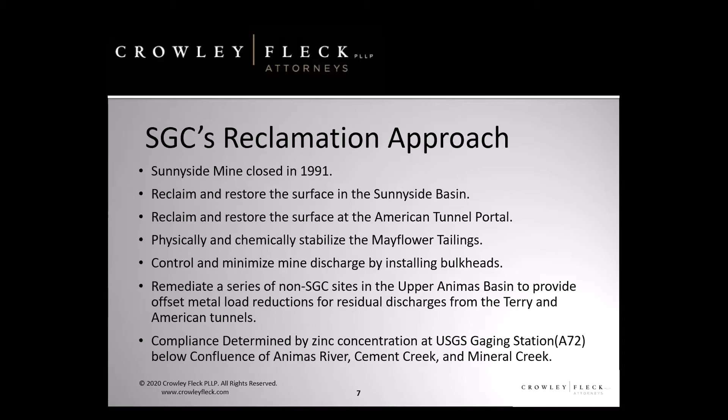So that was the plan in 1991. This plan was set out actually in their reclamation permits, even as they began mining. It was ultimately put into a consent decree with the state of Colorado and approved by a court. EPA was not a signatory to the consent decree, but they reviewed the plan that was put together, provided comments, and ultimately endorsed the approach.

The experts reviewed the proposal for bulkheads and concluded this was an ideal location for that type of approach based on the geology and the ability to restore the hydrogeology with bulkheads. EPA applauded the parties and this kind of new basin-wide approach to water quality, not just site-specific, but basin-wide. So that was the plan. It was reviewed, it was approved, it was published, it was commented on, and Sunnyside went to work.

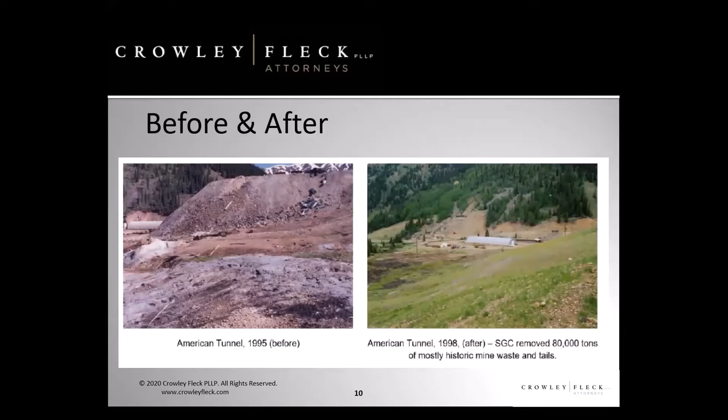I mentioned the bulkheads. That was a big part of Sunnyside's reclamation plan. The intent was to restore natural hydrology. Before mining, the mountains would have been full of infiltrated groundwater. After mining, that water comes out the adits. If you put in a bulkhead, the water is back to where it would have been before mining. So SGC installed a series of 9 bulkheads in the Sunnyside mine and the American Tunnel and the Terry Tunnel. Those bulkheads, they're massive. They were engineered, over-engineered, over-designed with factors of safety, and they isolate the interior workings of the mine and prevent water flow from the interior workings directly to the surface through those adits.

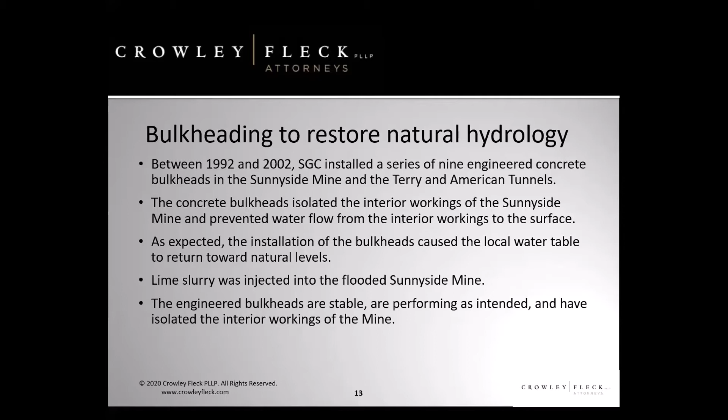As expected, installing bulkheads did cause the water table to return towards natural levels. So you had some seeps, springs, and other flows increasing. That was, again, the goal. That's what it was like pre-mining. Sunnyside also injected thousands of tons of lime into the mine pool to try and speed up the neutralization process. All of the bulkheads Sunnyside installed are stable. They're still performing as intended, and they've served their purpose. They've isolated the interior workings of the mine.

Again, what was somewhat unique about this is the region-wide approach to reclamation. Sunnyside would be released of its reclamation obligations, both in exchange for bulkheading the mine drainage, but also for completing other reclamation projects in the region. So they installed 9 bulkheads on property they owned and property that they didn't own. They also removed mine waste and historic tailings from other properties and put it on the Mayflower impoundments, and then again recontoured and reseeded areas to improve stability and vegetation.

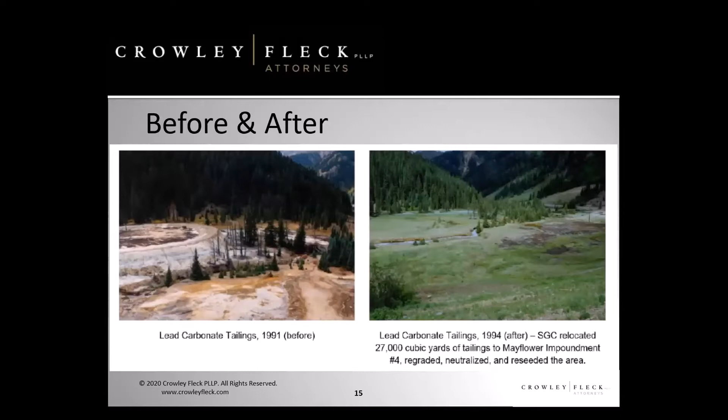So this is a picture of the lead carbonate tailings. This is an area Sunnyside never owned or operated, but reclaimed as part of their consent decree and reclamation obligations. And again, it's sort of risky to touch a property you don't own with CERCLA, but that's the decision that was made and the efforts that they undertook. So that's where things stood.

They spent, and this number has grown, $30 million on reclamation and remediation. For their efforts, they won an award early on from the Mineland Reclamation Division and the Department of Natural Resources in Colorado for just bringing the site back into compliance from the way it was left following the Standard Metals bankruptcy. And then again, as part of their closure activities, they won that Mineland Reclamation Award in 1994.

They ended up fulfilling all their regulatory requirements, complied with their reclamation obligations. The consent decree was released in 2003, and things seem to be in a fairly stable status. That's how it was in 2015. The bulkheads had been in place, functioning as designed for many years.

State of Colorado and EPA were doing work on other sites in the area, installing additional bulkheads to further restore that natural hydrology. I've heard it described as a whack-a-mole approach. As water comes out one adit, you bulkhead that one. As it moves to another adit, you bulkhead that one, and slowly you put the mountain back to the way it was before mining. So EPA and Colorado put a bulkhead in at the Red and Bonita mine.

They did not close it. They just closed it for the first time this summer. And they were contemplating an additional bulkhead at the nearby Gold King mine. And bulkheads, the purpose is you fill these mines with water, you submerge the metals in water, you reduce the oxygen availability, and then you reduce ultimately the generation of acid rock drainage and thereby improve water quality. That's the whole point.

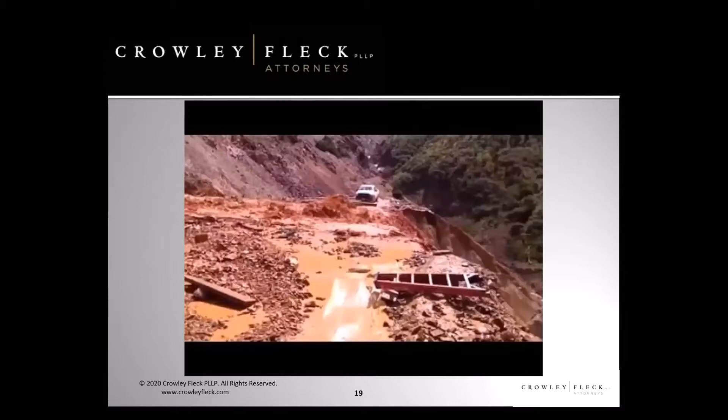EPA and its contractors are working in 2015. They excavate into the exterior of the Gold King mine, and they end up releasing about 3 million gallons of impounded water. That water washes away a BLM-owned waste pile. It turns the Animas River bright orange. People will remember that slug of tan-colored water makes its way downstream for several days and eventually, weeks later, settles out in Lake Powell. I think this video will play and you can see really what happened on the day of the event.

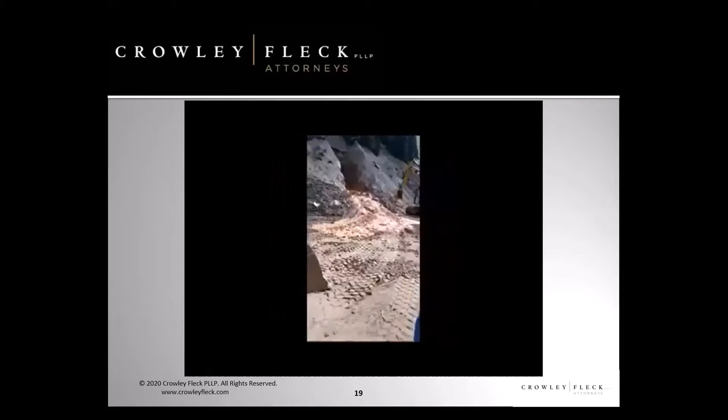Whoops. I'm going to go back and try that again.

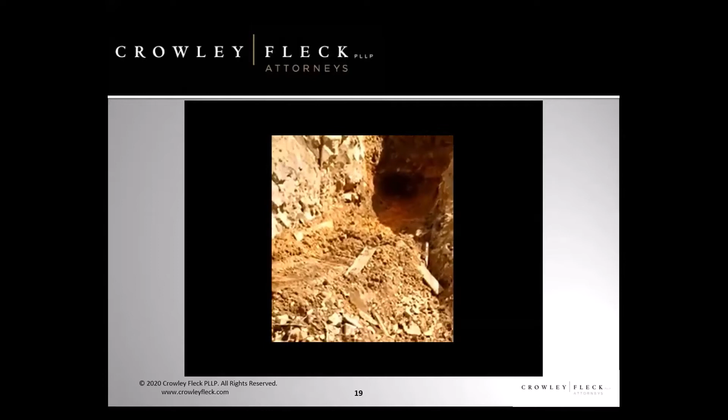See, this is as EPA's excavating into the exterior, then drainage starts coming out.

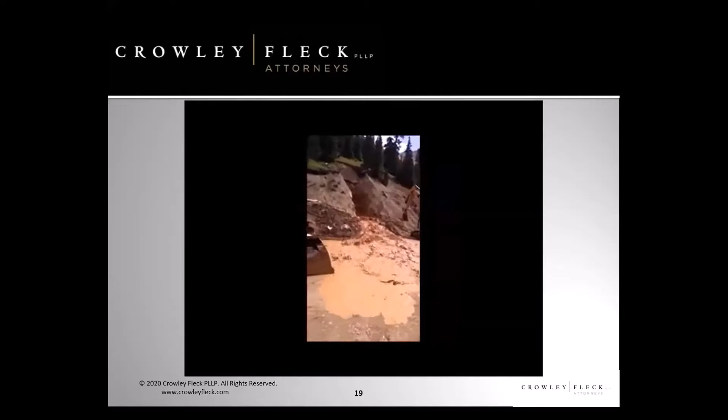Really high. Is he gonna go close it up?

The suggestion that they close it up, you'll see, was not followed.

What are we doing now? Get a little video of this, I suppose. We were back 20 feet out.

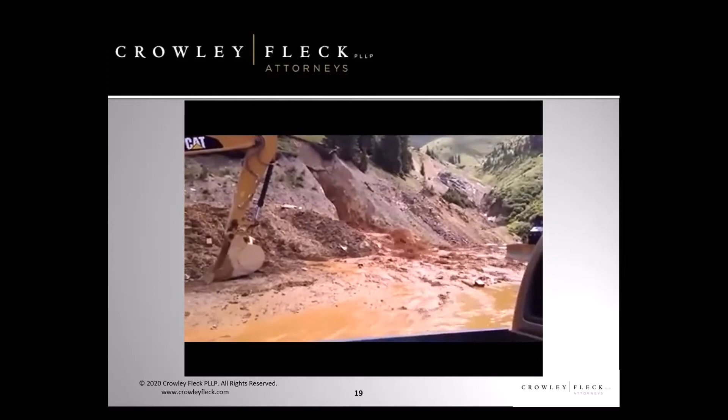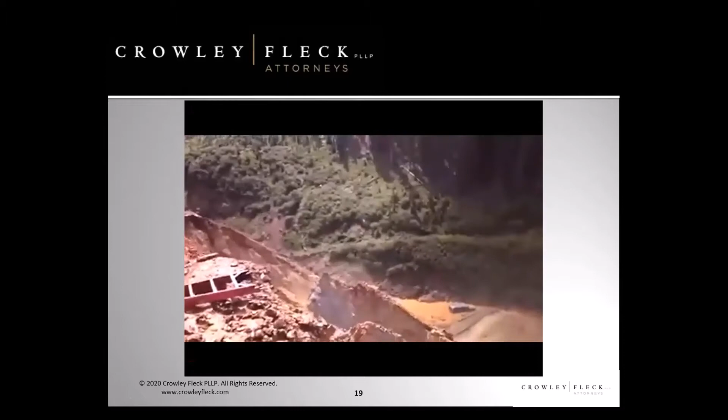That's the BLM waste pile downstream that ends up being washed away. It's saying that's all the water coming from the Gold King mine. The volume is estimated at about 3 million gallons, and it comes out very quickly.

This is a famous picture that was taken of kayakers in the Animas River. You can see that's what ended up happening to the river. The color that it turned generated national and international media coverage. Here you can kind of see, that's what the river used to look like. And then this is the slug of orange water making its way downstream.

Ultimately, there was no impact to the fishery. That was good news. The river returned to pre-blowout conditions within about a week. The New Mexico Environment Department has found no long-term damage to the environment. State of Utah, their environmental folks reached the same conclusion. I mean, it looked bad, but it actually didn't cause much, if any, damage to the environment.

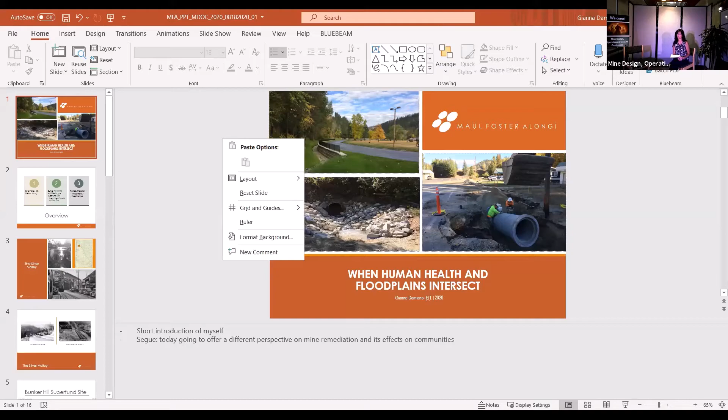So our next presenter is Gianna Damiano from... what's that? Gianna, can you flip your PowerPoint display settings? Is that better? Is that better, Dan? Could you try it again?

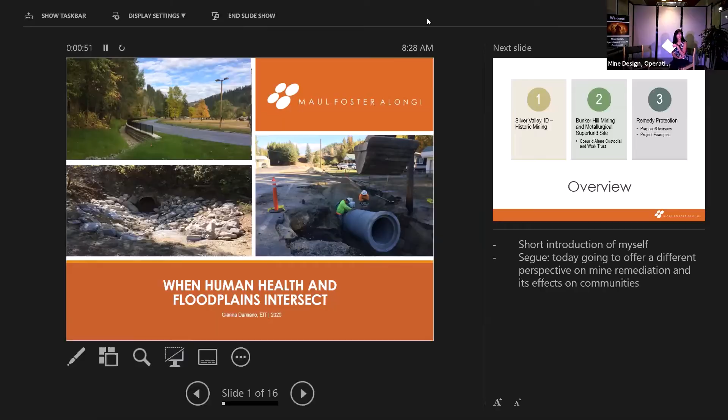Okay, well, while we're waiting for the PowerPoint to get sorted out, I will introduce Gianna. Gianna Damiano is an engineer with Maul Foster Alongi in the North Idaho offices. Since her career began in 2016, she has been involved with projects on the Bunker Hill Superfund site in the Silver Valley. Through her experience as the oversight officer and client representative and now project manager for stormwater management related projects on the site, she has garnered a unique perspective on using engineering principles to benefit communities. Today, she will be speaking on this intersection of communities and remediation efforts at the Bunker Hill.

So welcome, Gianna. Thank you, Susie. Is it all sorted out now? Yes, it looks good. Perfect.

So good morning, everyone, and thank you for the opportunity to speak to you today about projects that I've been closely involved with for the last 4 years. As Susie mentioned, my name is Gianna Damiano. I work in the Kellogg and Coeur d'Alene offices for Maul Foster Alongi, and have been working for the last 4 summers up to last year on projects within the Bunker Hill Superfund site called Remedy Protection, which is what I want to talk about today. And it might be a slightly different perspective on mine remediation and its effect on communities than we've heard before.

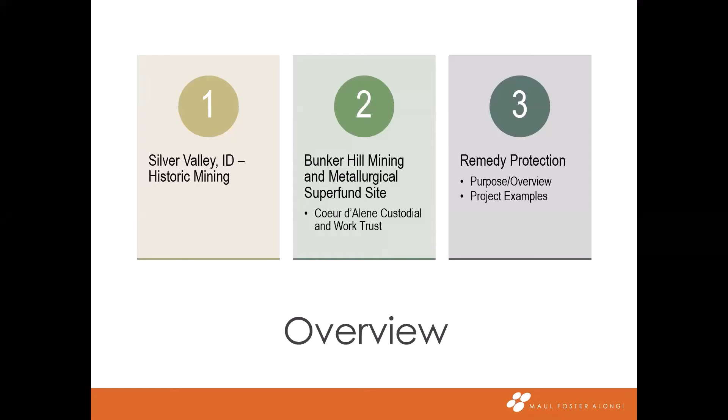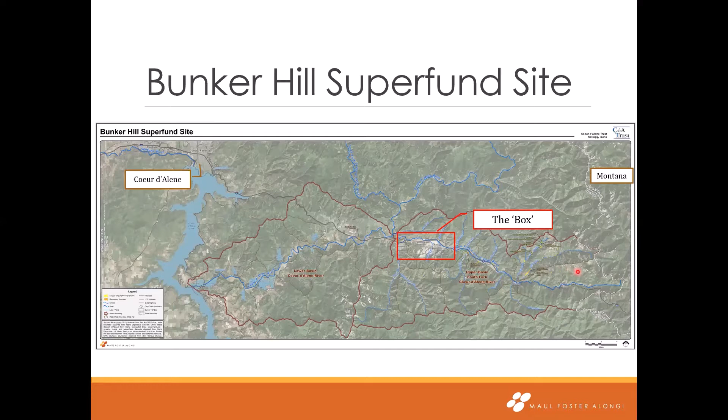So the program that I want to focus on and dive a little bit into today is called the Remedy Protection Program. It is a program that was implemented to protect the selected remedy from erosion or recontamination caused by contaminated stormwaters. So what is this remedy that I keep mentioning? This remedy that's being protected is the 5.9 million square feet of clean soil caps that act as protective barriers between contaminants of concern, which among the list include lead and arsenic, and receptors in mostly residential areas.

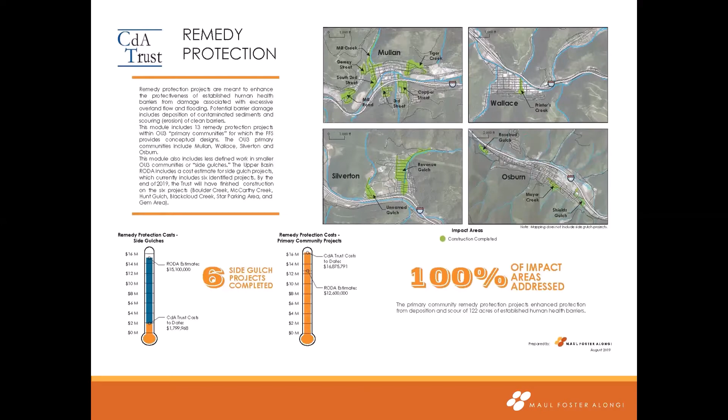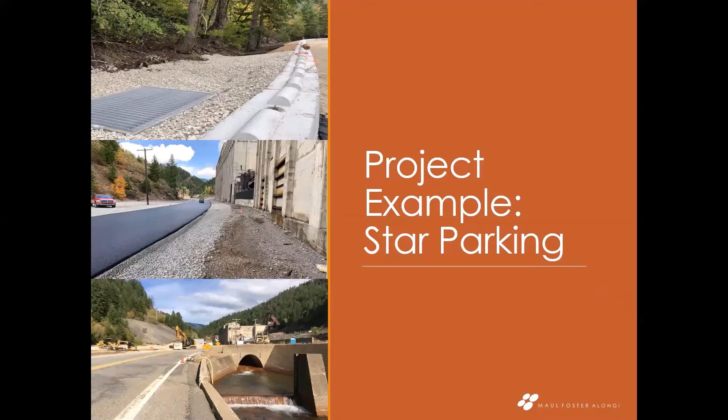And here we installed a couple inlet structures, approximately 900 feet of storm drain pipe, 3 catch basins, and a couple manholes, as well as surface restoration items that range from riprap to topsoil with seed and asphalt. And this was a project example of one of our side gulch projects, not in an incorporated city.

The next project, we'll move to Mullan, Idaho, on the Mill Creek project. Mill Creek was a channel capacity and conveyance project along the flood-prone tributary of Mill Creek in Mullan, Idaho. The channel was undersized to carry capacities modeled in the design storm, posing flood damage and ecological risks to the houses and remedies along its alignment.

The old channel also posed safety risks to the community as portions of the channel flowed through an old box culvert that caved in a yard that had children living in that house at the time, as well as the channel ran through a house basement at one point and under walkways that just had planks covering it.

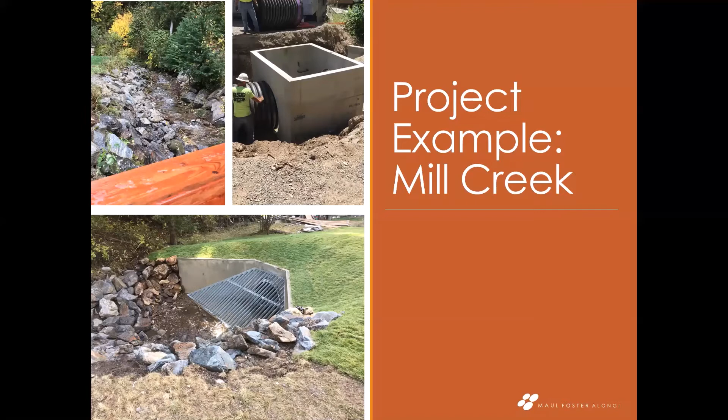And though the community that we were working in was fairly small, it had a large drainage basin north of it that came down off the hill and all discharged down this road. And most of the culverts and previous infrastructure had been long clogged, causing overland and sheet flow just down this road in the spring.

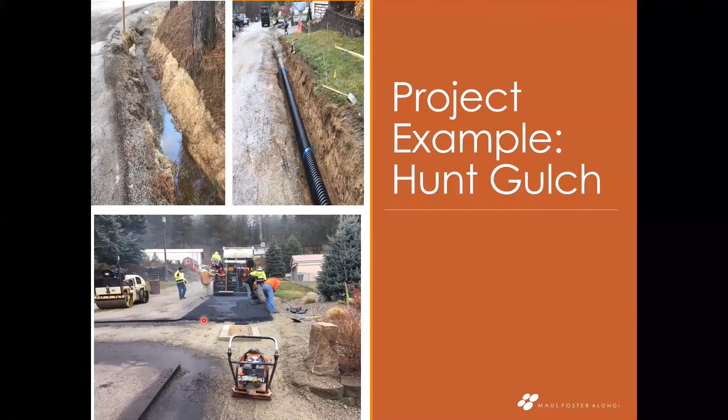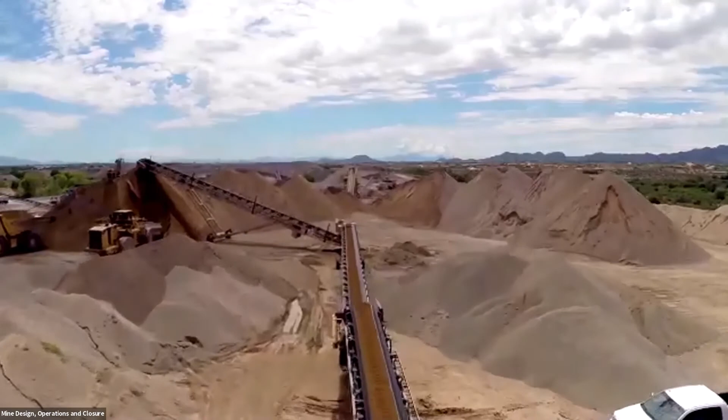Well, the material at this site ends up in a lot of different places: roads and highways and infrastructure and houses and sidewalks and schools. Materials that are mined here are really the building blocks of our society. And without sand and gravel mining, you don't have the modern society that we have today.

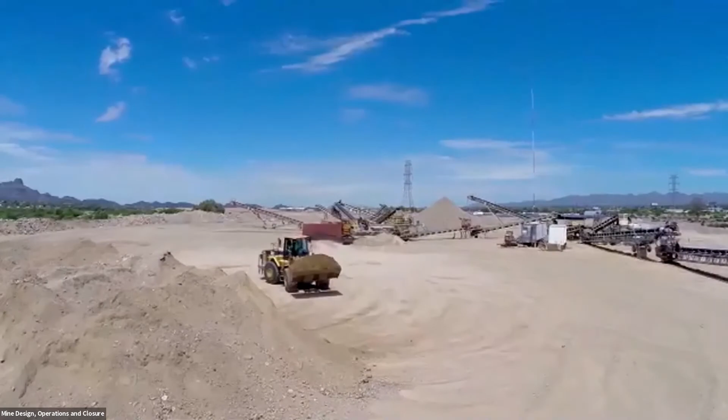We look for solutions that fix kind of the bigger picture. We're not just out there putting a hammer on a nail head. We're out there saying, okay, who are the stakeholders? What are the issues involved? What are the kind of interchangeable pieces here? Things that make a difference when you're trying to build a solution that meets multiple needs.

We have our core practitioners, the people that have had their boots on the ground on mining sites, have often worked in the mining industry. We've got one profit and loss center, which doesn't silo our resources and our people. We don't compete against each other to solve our clients' problems. We can take diverse experience in different industries and apply them to deliver some innovative solutions for our mining clients.

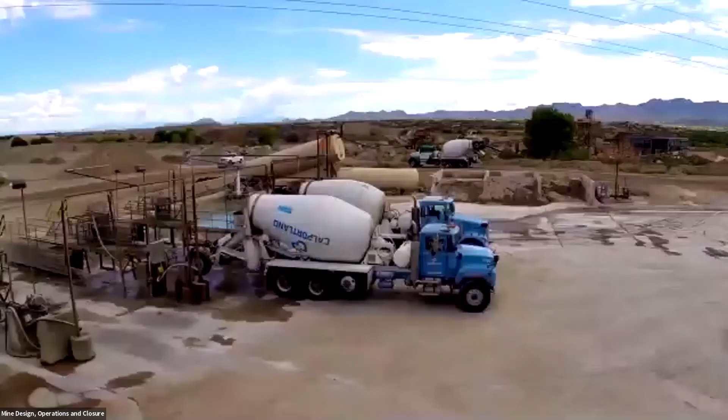We ask a lot of questions. We ask questions about, okay, what are the things that are immediately right in front of us? What do we need to fix right now? Who are the stakeholders involved? What are the other pieces of the puzzle? The idea is that we come to the table once we've done a lot of listening with solutions that really fit our clients' needs.

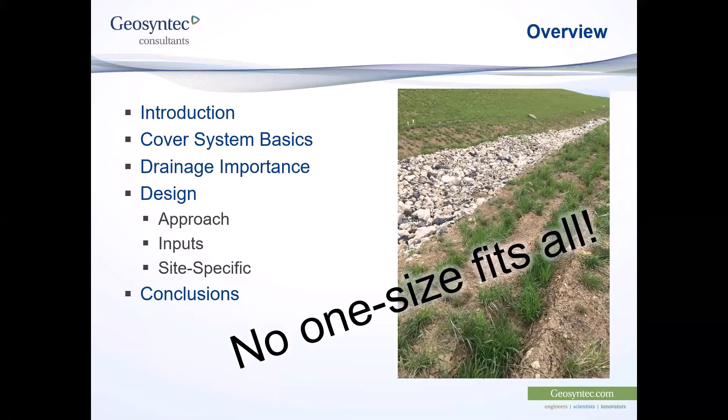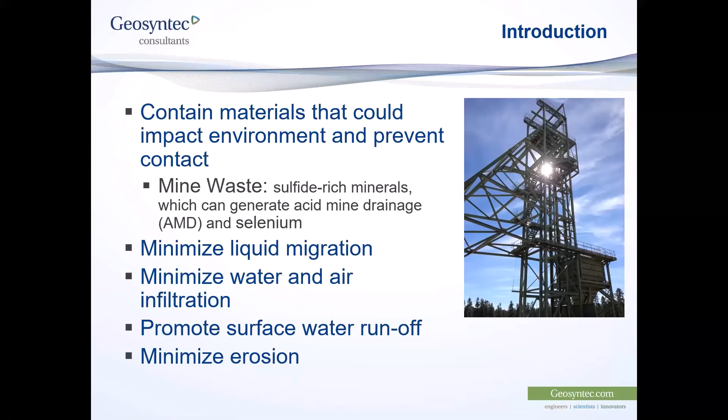Why do we have cover systems? Well, a few reasons. They contain materials that could impact the environment and prevent contact with those materials. In mining, that might include sulfide-rich minerals, which can generate acid mine drainage, and selenium leaching rock. They minimize liquid migration, so if you already have liquid in your waste, it minimizes the mobilization of that liquid. It minimizes water and air infiltration, the key to minimizing AMD and selenium leaching, and promotes surface water runoff and minimizes erosion.

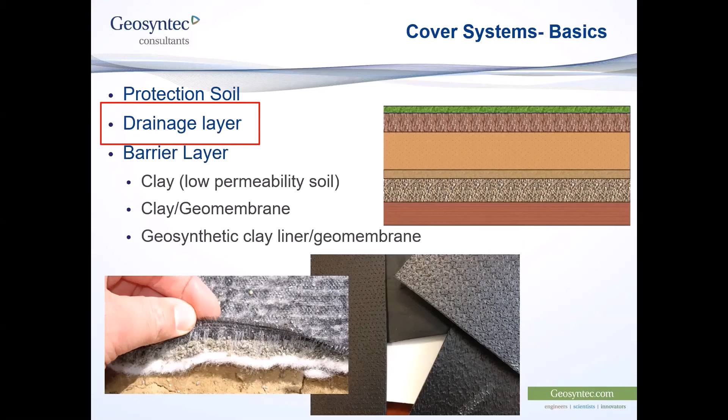The drainage layer material may consist of aggregates such as rock or coarse sand, or a geosynthetic layer such as a geocomposite, geonet, drain liner, and/or geotextile. Typically, the geotextile is used in conjunction with the drain liner or geonet, or as a component of the geocomposite, and is less common alone. In the rest of the presentation, I'm going to generally refer to the design of geocomposite as the more common geosynthetic drainage material in this application.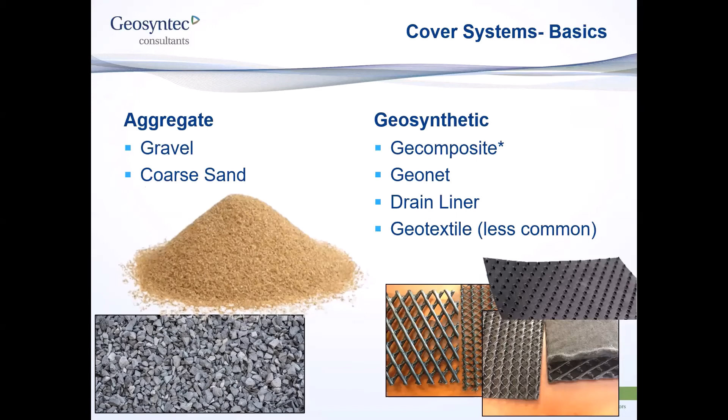We're primarily going to focus on the capacity today and how to design a system for the right capacity, accounting for worst case flow conditions to minimize veneer stability concerns, and account for reduction factors such as clogging.

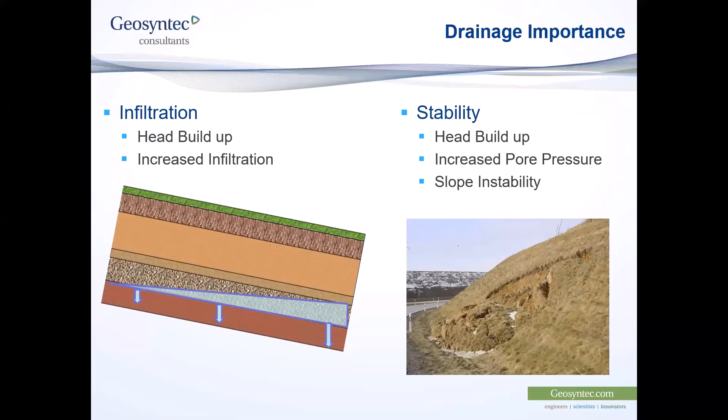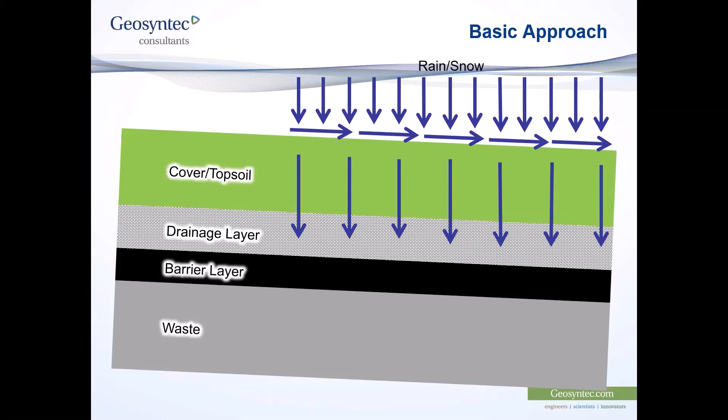Now that we understand the importance of drainage, how do we design for it? Rain and snow fall and collect on your topsoil, and a portion runs off. As the rain continues, or as the snowmelt continues, water starts to infiltrate or percolate through the cover. This is typically assumed to be unit gradient flow to account for rain on snow or snowmelt conditions. The drainage layer begins to fill, and water travels downslope with its depth or head rising as it continues downslope. As the water head increases, the driving force through the barrier layer increases, and saturation and potential destabilization of the cover soil begins.

Based on the resulting impacts to the overall cover, the drainage system needs to be designed with fairly basic concepts: contain the flow in the drainage layer, minimize head as a driving force through the barrier layer, and do those two things by providing an outlet for the water in the drainage layer, which might be a bench or a pipe.

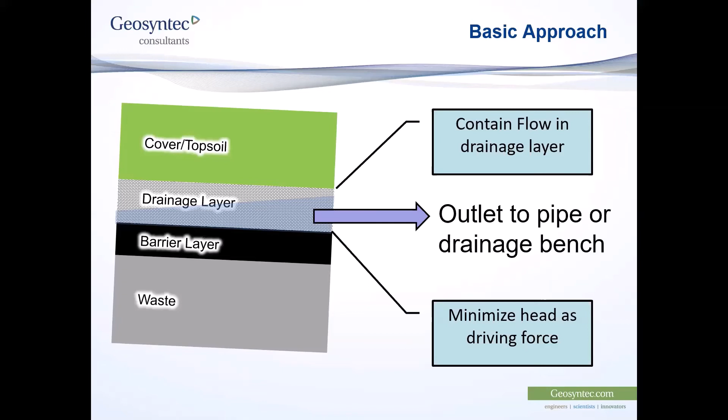Conceptually, there are three main components which can be adjusted to develop the site-specific drainage to achieve the basic goals. The first is the saturated hydraulic conductivity or transmissivity of the drainage layer, or how fast the water will move through the layer. This is material dependent, so it coincides with your selected aggregate or geosynthetic. The second is your thickness. This is a variable that the designer can control in the case of an aggregate, but is more fixed in the case of a geosynthetic, which come in different sizes such as 200, 250, 300 mil thicknesses.

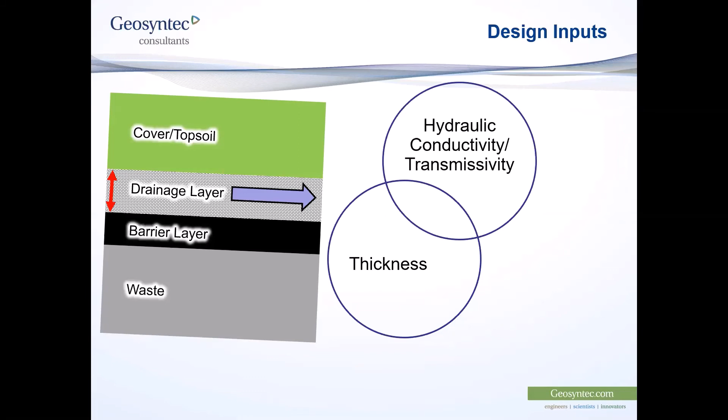The third is your outlet spacing. This may be dependent on how you're building your dump and the associated benches for global stability or simply constructability, or can be drainage design specific, such as this cover drainage or your stormwater system.

So those of you who remember your Soils 101 course may recognize what these elements are: essentially Darcy's Law. Our Q will be the flow allowed in by our cover soil. Our K is the hydraulic conductivity or transmissivity as adjusted for the geocomposite of the drainage layer. Our I is the gradient of flow in the drainage layer, and our A is a function of our outlet spacing. Pretty simple concept, which of course we need to make appear more complicated, as I'll show.

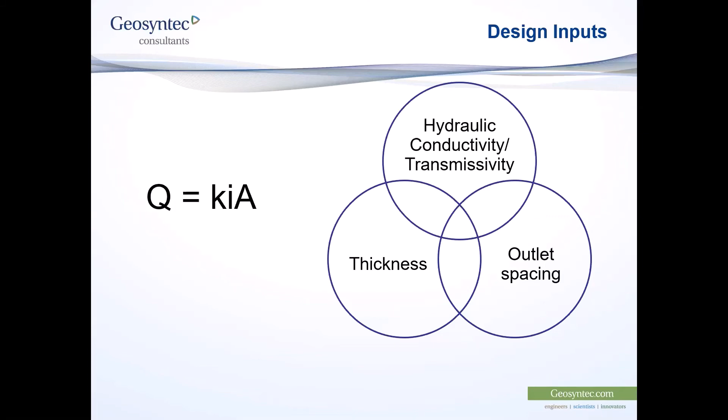So now looking at some of the more technical slides, these equations are Darcy's Law restructured for our cover drainage purposes. The aggregate equation I provided is adapted for our slope inclination, our flow in and out, and the area broken out into length and thickness.

The geocomposite equation I provided accounts for the transmissivity of the geocomposite rather than hydraulic conductivity, simply a function of the thickness of the geocomposite. The variables of the equation can be set with the remaining values solved for in order to develop your site-specific design approach. And we'll talk about that some more in the next few slides.

Before I move on, however, there are two items that I do want to point out. The first is the cover hydraulic conductivity. The K cover, or the hydraulic conductivity of the cover, needs to be carefully considered. Soil generally degrades to between 1 × 10⁻⁵ and 1 × 10⁻⁴ centimeters per second. So regardless of your cover soil hydraulic conductivity at installation, design to a higher permeability is recommended. So that really starts to limit your flexibility with the KSAT of your cover soil.

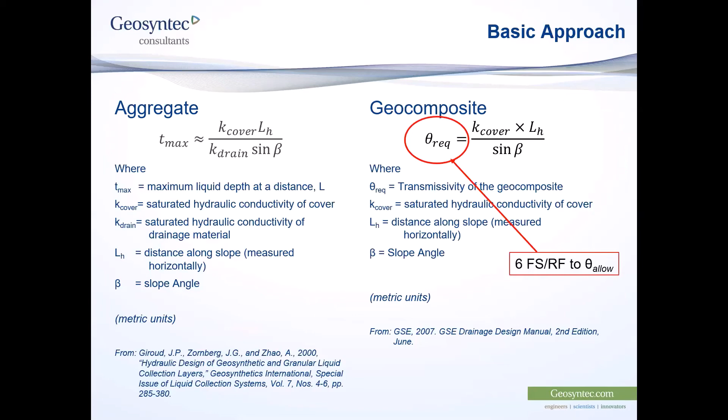The second item is the required transmissivity versus the allowable transmissivity of your geocomposite. There are 6 factors of safety and reduction factors for the geocomposite for transmissivity, and I'll talk about those in the next slide.

There's 6 reduction factors and factors of safety for geocomposite. Why so many? Because there is a lot less room for error in the design of a geocomposite. They're thin and slippery, and that is the technical term, slippery. So you want to make sure you aren't designing too close to optimum conditions. The overall drainage factor of safety is based on the overall importance of the drainage system for cover stability.

The installation factor of safety is based on how difficult the construction conditions are and allowing for room for human error during construction. The long-term creep reduction factor accounts for the possibility of creep in the geonet or flattening of that geonet structure, which is typically a low reduction factor in the case of a cover system due to the low overburden stresses. Chemical clogging is typically low for cover systems unless you know you have possible precipitants from your minerals in your cover soil.

Biological clogging is typically higher for cover systems, knowing you might see root intrusion into the layer. And geotextile intrusion from the underlying and overlying geotextile may be low or high depending on the designer's best judgment. Typically, the closer your testing conditions in the lab are to your build-out conditions, the lower you can make this value.

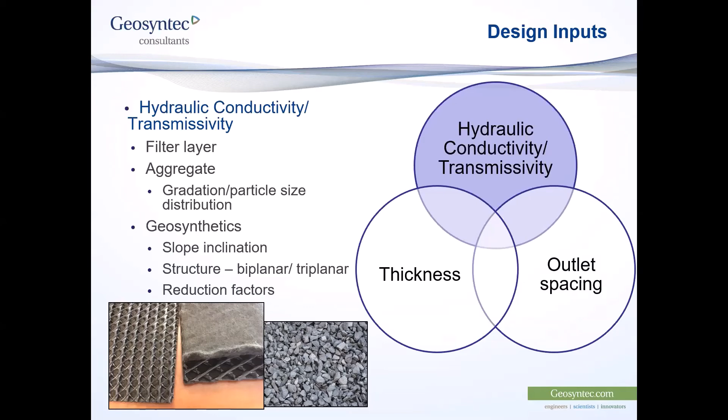The next design input, part of your Darcy's equation, is the thickness. You have significantly more flexibility with this in design incorporating aggregate than one involving geocomposite. What may set your aggregate thickness is either your maximum hydraulic head through your barrier, say you don't want more than 1 inch per year of water getting through your barrier, and back calculating what that driving head might be, or the factor of safety you might put on your thickness.

We didn't talk about incorporating a factor of safety value in the aggregate equation before. It's not as established as geocomposites. Generally, a factor of safety for aggregate is set by a designer and the level of certainty they have in the remaining design features, but may vary from a little over 1 to 2 or more. Personally, I like factoring in the constructability element of the design, which may include installation of nothing less than 6 inches, but more likely a 1 foot minimum thickness for your drainage layer.

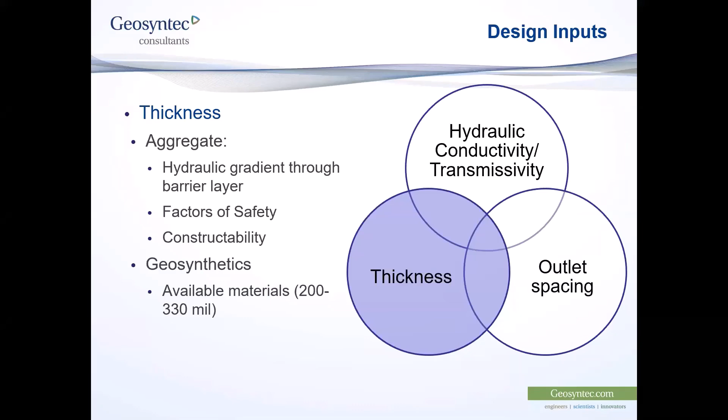Geosynthetics are much more straightforward in determination of your thickness. As I mentioned previously, it's set at the thickness of the material, which will generally vary between 200 mil up to 330 mil, maybe even as high as 350 mil.

What sets your outlet spacing? For benches, it may be what the mine is already doing for constructability of the dumps and/or global stability of the dumps. It may also be planned for stormwater control to minimize erosion. Ideally, you want to match up your cover drainage outlets with what's already planned so you don't end up with benches every 200 horizontal feet and one for drainage every 150 feet.

For pipes, it'll be the size of the conveyance. Generally speaking, you're not going to want to put a massive pipe in your slope. So what can a 4, 6, maybe even 8-inch pipe convey at the slope anticipated? And then what can the down drains those pipes connect to convey? You can work your way backwards to understand what the drainage area can be managed by that size pipe and ultimately end up with your outlet spacing.

So how do we put all this together? In these next 3 slides, I'll generally speak to when you have one of your input values set and how to adjust the other values to make your site-specific design that works. This first case is when you have a set hydraulic conductivity or transmissivity, such as an on-site aggregate you want to use, or a specific type of geosynthetic which may be readily available.

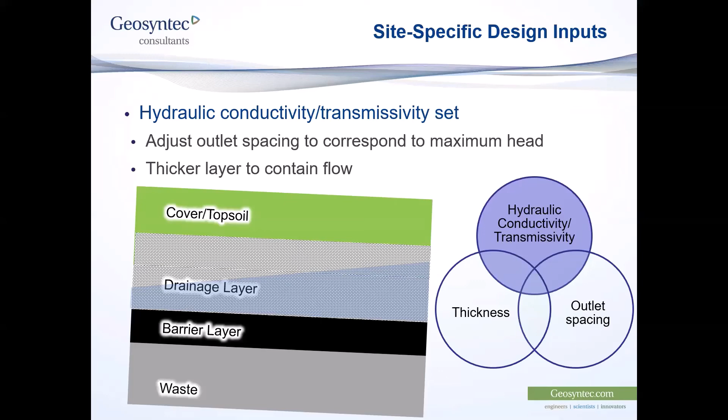As my illustration shows, at some point, your flow depth exceeds your material depth. So what do you do? You can add an outlet at your design depth, thickness reduced by a factor of safety, or you can thicken your drainage layer. These options are a little bit more limited for a geocomposite, pretty much being limited to changing your drainage layer outlet location.

The second case you might have is a set thickness. This might be the case for a geocomposite, you have limited aggregate material, or you have a maximum head for your calculated percolation through your barrier layer. You have 2 options again. One is to set your outlet at your maximum allowable drainage head, again determined by your maximum percolation or driving force. The second option is to select an alternative drainage material with higher hydraulic conductivity or transmissivity. Thus, the water flows downslope quicker and doesn't allow for the head buildup of a slower material.

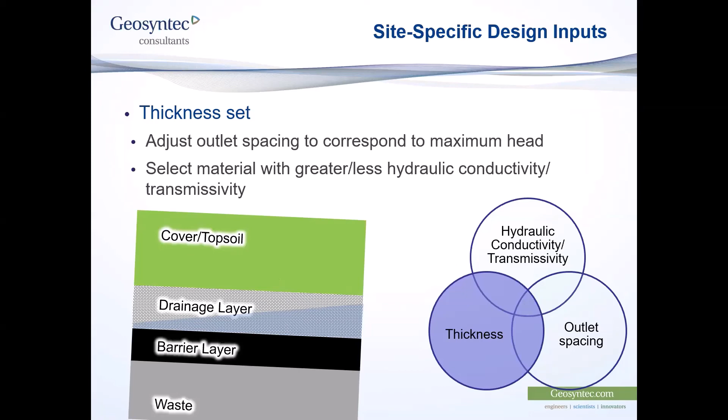Finally, the last scenario I'll touch on is when your outlet spacing is set. As I mentioned, this may be due to dump construction, global stability, or stormwater controls. Keeping with our 3 variable theme, you'll look at adjusting the 2 remaining variables. You can increase the thickness of your drainage layer, or you can identify alternative materials with higher hydraulic conductivity or transmissivity.

So quickly approaching my conclusions, I want to discuss just some best practices. The first, as I mentioned a couple of times, the unit gradient flow through the cover. Using unit gradient flow can seem like overkill and sometimes can result in an infeasible geosynthetics design, but it is seen, and it may only be seen for 1 to a few days per year during snowmelt, but it is seen, and if you don't account for it in your design, you have the potential for a slope failure.

Always use a filter layer. As I've said throughout the presentation, if you don't have a filter layer, your cover soil will clog your drainage layer and result in reduced hydraulic conductivity and potential future failures. Keep your outlet spacing to less than 200 feet horizontally. This is really a design preference, but generally for global stability and stormwater, there will be benches at this distance. If there are concerns with material, the impacts will be limited to 200-foot increments, and I've generally found that folks are uncomfortable going with much more than this.

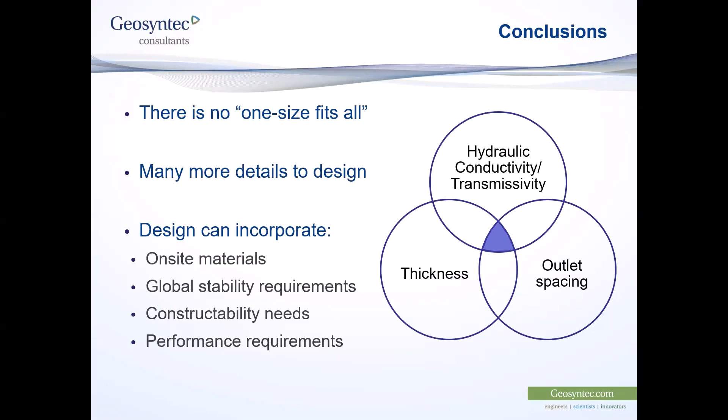There are many, many more details to design than I've covered in this presentation, from additional discussions on unit gradient flow and cover soil saturated hydraulic conductivity, to filter material layer design to frost protection. To cover all of these elements would probably be a day-long short course. And with that, I will wrap it up if anybody has any questions.

Sorry. Are there upper conditions for selecting the hydraulic conductivity of the drainage layer, i.e., wouldn't you always seek to maximize KSAT? You can. So a lot of times, and this is something that we found, your measurement of KSAT ends up being limited by your equipment. So if you have a super high permeable material, you want to make sure that you do large diameter testing, which might only be at a specialized lab.